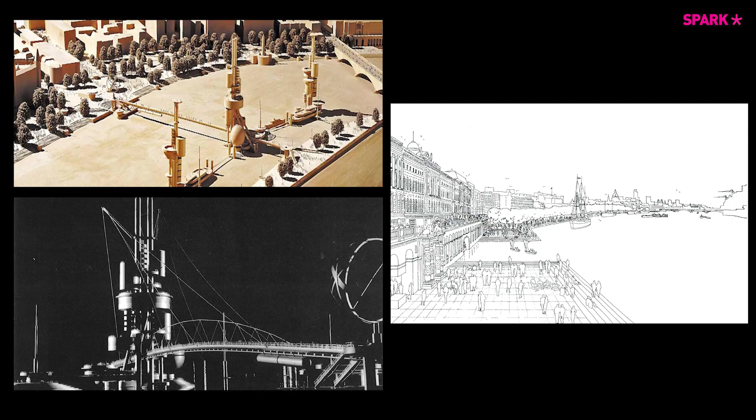There are a couple of projects I did before I started my own practice that meant an awful lot to me, and I'll tell you why. When I graduated in 1984, I was incredibly lucky enough to work for Richard Rogers and Partners, as it then was, on a number of projects, but this perhaps was the most interesting for me, and I'll tell you a little bit why.

When I was in school, finished at the RCA, and I'm sure Mike will attest to this, there were sort of 2 camps of thought that were prevalent at that time. One was postmodernism, and the other one was British high-tech architecture. But a lot of people say you couldn't call high-tech a style.

But I was enamored with British high-tech because I loved its legibility. I loved the component nature of it. And I always liked to draw nuts and bolts and staircases. So, as I said, I was very lucky to be offered a job at Richard Rogers and fell into it.

But to my shock, I ended up working on this project that was produced by Norman Rosenthal at the Royal Academy under the banner of Rogers, Foster and Stirling. So funnily enough, I sat in a taxi with Norman, Richard and Mr. Big Jim himself, which was 7th heaven as an architect.

But I suppose what was surprising about that project was my understanding, or getting to know, that Richard was really interested in urbanism. It wasn't just about high-tech nuts and bolts. This was a bit of a surprise to me, and maybe I was a little bit stupid when I was studying, that I didn't understand the greater philosophy of architecture and the importance of the thinking behind how architecture can contribute to cities.

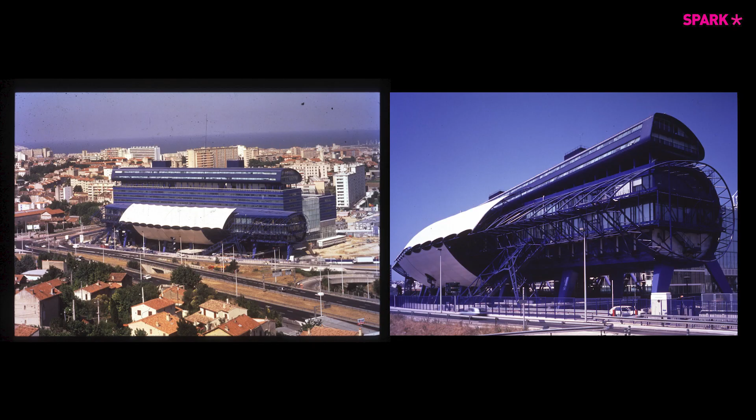When I left Rogers, I went to work with two guys who'd worked for Rogers, then quite quickly I went to work for Will Alsop on this project, Le Grand Bleu. I was project architect for the four-year generation from its design implementation through to construction. At that time it was the last of François Mitterrand's Grand Projets, and one of the largest projects being built in Europe, or anywhere—nearly 150,000 square meters.

I thought I'm never going to work on a project of this scale again. It's testament to Will's ability that he was able to understand a project of that scale and piece it together in a mechanically interesting way. It was an extraordinary learning curve for me, and what stayed with me is learning to deal with that scale of project—in Europe it might have been large at the time, but in Asia, where I work now, it's an average size project.

The third project, in my hometown of Cardiff, was part of a series of quangos set up by Mr. Heseltine and Margaret Thatcher. They did a lot of damage, particularly to the Welsh coalfields, shutting them all down, but they did set up these extraordinary businesses in the UK—in Cardiff, Manchester, Liverpool, Glasgow, and the Royal Docks in London—quangos set up to regenerate disused parts of cities.

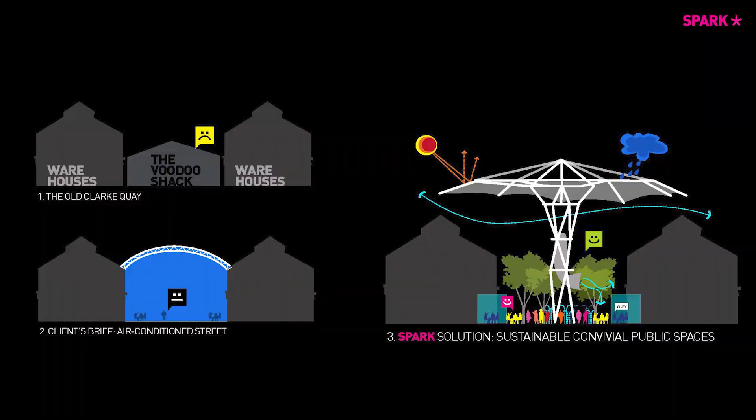Our client, CapitaLand, bought it and asked us to look at regenerating it. They had a previous scheme from the late 1980s that had failed very badly. After our intervention, it regularly gets 12 million visitors a year, an extraordinary achievement—it's basically a nighttime district. We put umbrellas over the roofs, with the client saying we should air condition it, since everything in Southeast Asia is air conditioned to get rid of the humidity, but we persuaded the client to naturally ventilate it instead.

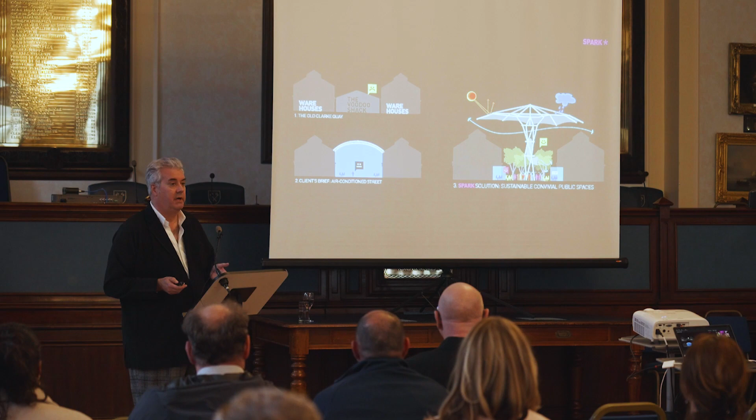Sustainability wasn't really a talking point in Asia at that time. But again, we managed to convince them to cover the streets, naturally ventilate them, and blow a sort of riverine-like breeze through the streets that gives you physiological cooling. So the temperature in the streets is reduced by about 4 degrees. It doesn't sound like a lot, but it makes them very comfortable.

No, 5 degrees, I lie. So it's very successful, and lots of tourists go there, and it became part of the brand identity of the city for a long time.

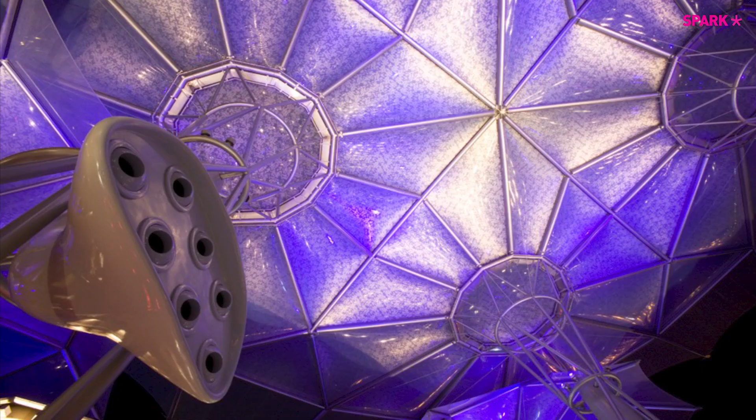And it was the first project in Southeast Asia to use ETFE foil as well. After this, the Beijing Olympic swimming pool used foil, but this was the first time. And there was a lot of process of getting agrément certificates, etc., to make it work.

So architecture, even though it looks a little bit alien to the city, can be great for place and conviviality, I think. And as I said, it became used in advertising on airlines and in the city about a great place for people to be, a great tourism destination.

It's rather ironic that when we were starting the project, the Urban Redevelopment Authority in Singapore, which is a bit stuffy, I have to say, was very opposed to this project. And they said, Stephen, if you go up on top of the hill in Singapore and look down, you'll be able to see this and it'll look awful. So you dutifully go to the top of the hill, and can't see it at all.

So they were opposed to it, and it was only our client having quite a lot of financial muscle, saying to the planning authority, if you don't allow us to do this, the whole place is going to be disused and negative, a lot of negative energy until somebody does something about it. So they gave in, we built this, and then ironically, they're sort of using it in advertising when it's all done. So, nice story.

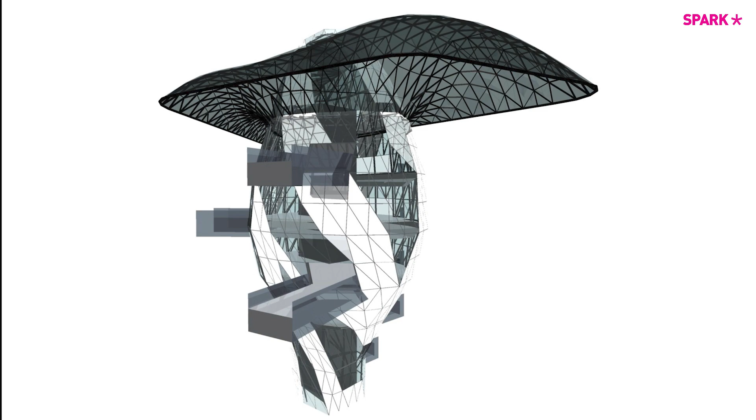So this is a section through the project, quite dense, on quite a tight urban site. But it had some very special components. This is called the Crystal Lotus that sits at the heart of the building. And it's there because the plan is quite deep, perhaps too deep for a typical retail shopping mall. So we decided to break the space and put this sort of glass plug in the center that's got specialty shops inside it and vertical accommodation.

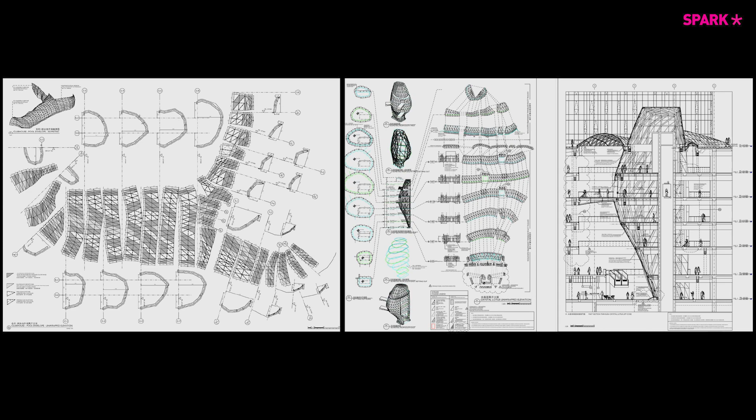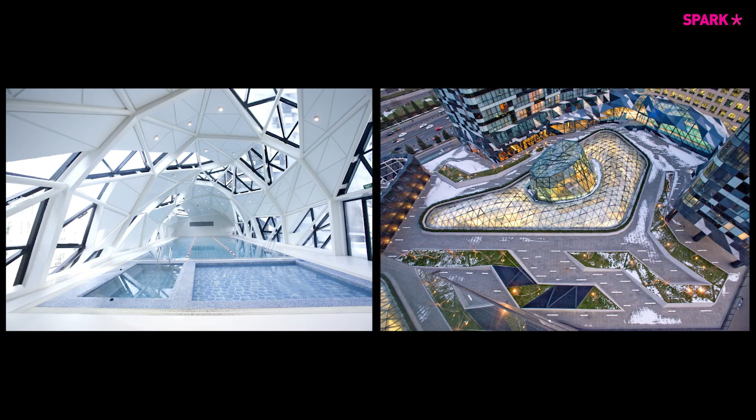And of course, it's quite early on in China. It's nearly 18 years ago now. So we produced, using sophisticated software, a lot of flattened out drawings of this and the roof structure, etc. But when it was built in a very sort of agricultural manner by the contractor, they didn't understand these drawings. They're using pieces of string to set out quite a dynamic roofing structure, which, to the horror of our engineers, Arup, said wouldn't work, and the roof was going to collapse, but it hasn't collapsed yet.

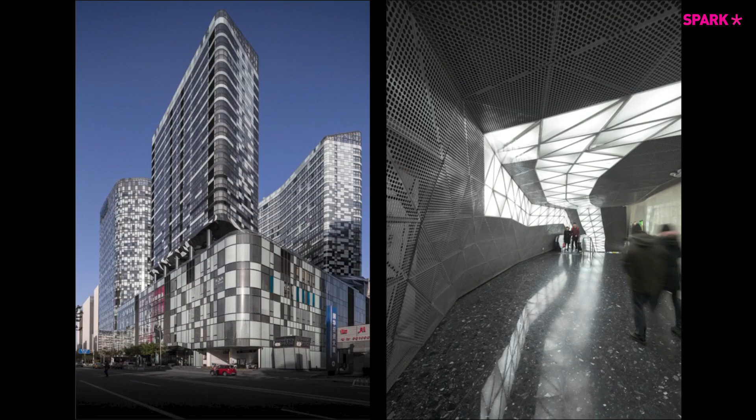So that's the swimming pool and the roof over the atrium space. It uses this tessellated geometry, which predates the current mathematical findings on roof structures. It's a leitmotif that runs through the whole building, this triangulated surface.

And it's got a metro station below it as well, which connects to the metro and to the section of the building. Here you can see people occupying the spaces outside at night time - a very nice picture of urbanity in Beijing.

I also worked on this project that started while Will was still alive, and carried on after he'd moved away from his original company. This is called the Shanghai International Cruise Terminal, and again it sits in a very important part of the city. The old Bund of Shanghai is here, and the old buildings from the 1920s and 30s are here.

Mayor Han, who was the mayor of Shanghai at the time, wanted, as in a lot of European cities, to extend the public pathway all the way along the Bund, across Suzhou Creek, and out towards the river. So a big garden allowing people to access the riverfront, which had predominantly been private domain of docklands, came to the fore.

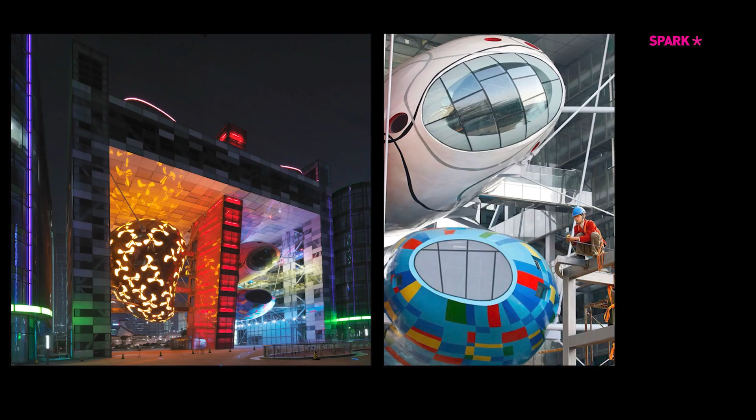But at the center there's this quite exuberant space that's an archway. It's an arch because we couldn't take any vertical load down at that point, as there's a tunnel under the river. So these quite interesting objects were initially designed to be cafes and restaurants, and are now being leased by Ferrari to sell branded goods.

Here you can see a chap finishing off the cladding. It's quite dynamic and theatrical at night time, and is the gateway from Daming Road in the north to this new embankment garden in the south. So it is a gateway to the river.

The next are two projects we've done for the same developer in Malaysia. This one is on the island of Penang, one of the old states of Malaysia. It's two residential towers that are the tallest twin towers in Penang. The one at the back is a residence, and this is a hotel tower.

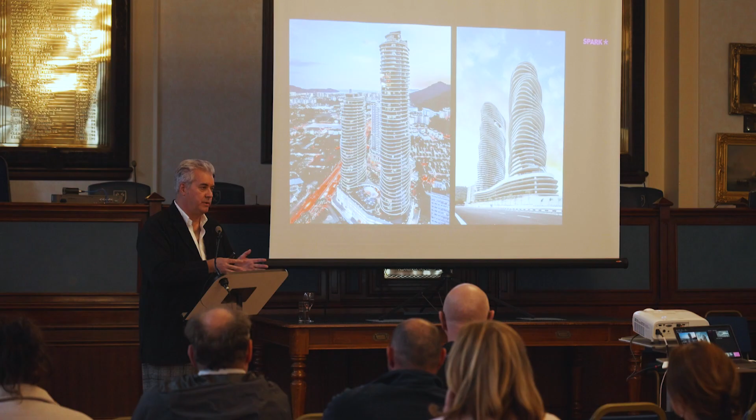It looks very complicated geometrically, but it's actually quite simplistic - the apartments and the cores go right the way through as a vertical cantilevered core. Then the slabs of the apartments are twisted slightly, rotating around the building, giving it this very curvaceous geometry.

Then at the mid-level of the apartment tower there are two pods: one is a jacuzzi pod, so you can have a jacuzzi looking out over the straits, and this is a clubhouse, which also gives fantastic views over the straits. Residents can hire these for events, just the same way as this room is being hired for this evening - you get wonderful views.

And then the top of the podium, the top of the car parking deck, is turned into a gymnasium and swimming pool, for aqua aerobics for the residents and for the hotel.

For the same developer, we recently finished this project in Kuala Lumpur, in the Mont Kiara district, which is predominantly a residential district right at the heart of Kuala Lumpur. We didn't start this project - there was another architect involved who designed a quite boring series of three towers, which the client didn't like at all. They said, well, can you do something interesting with it?

So we came up with this series of fins based on his thumbprint, which he quite liked the idea of. So that's what we did - we clad the towers with his thumbprint.

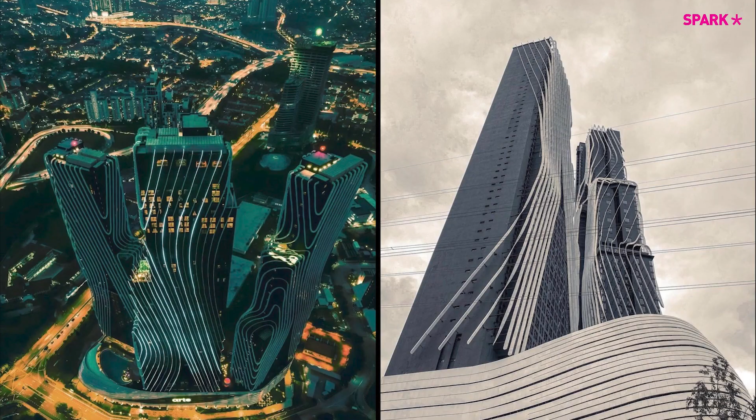So they become quite iconic - I hate that word actually, iconic, I don't, let's try and stop using it - so they become interesting on the skyline of Kuala Lumpur.

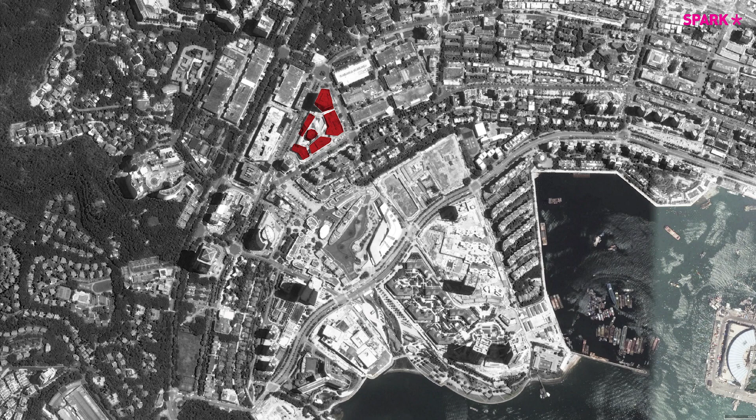So our project, and the reason I'm showing it to you, you can see the figure ground plan here. It's quite permeable, deliberately so, to engage with the streets around it, so people can move through it. It becomes like a city living room. You can see the diagrams - it's got a bus station and a metro station that sit to one side and below the building. The permeability of the plan is important to bring people into this new courtyard, the living room of the building.

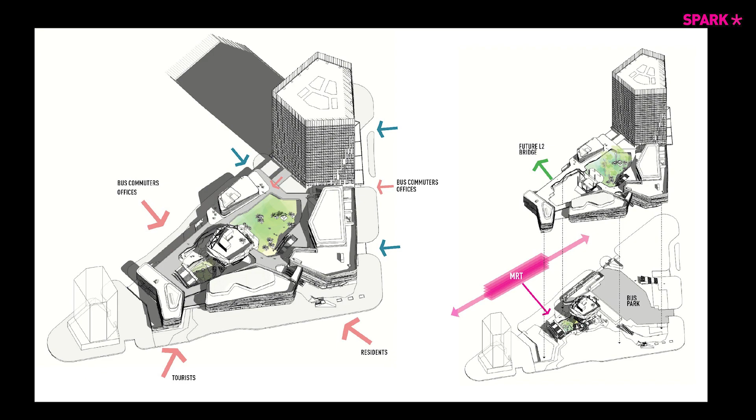So there you can see the diagram that proves that. At the center there's a lantern-type building that hovers over the courtyard space. This is the connection down to the metro and the basement shopping areas, and the terraces around it. It's basically an open-air shopping mall, and there aren't a lot of these in Southeast Asia because of climate control. But it's a much more sustainable way of developing the shopping center typology, especially where the climate isn't too bad. It's quite temperate in Shenzhen, not really humid like Singapore, and relatively warm, so it's perfectly appropriate for natural ventilation and providing this sort of space.

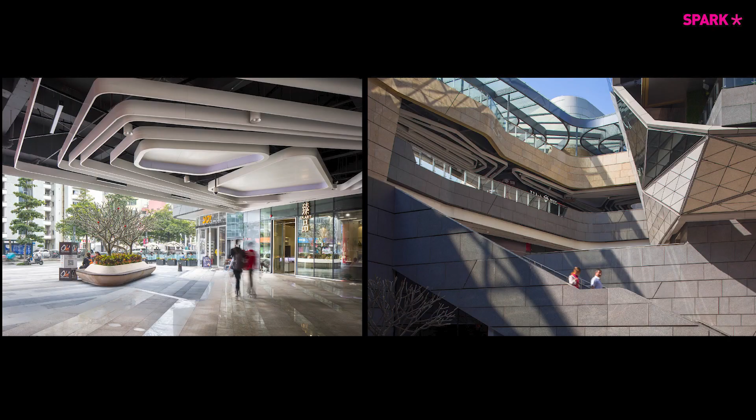So here you can see one of the openings to the street that bring people into that courtyard. It's been very successful, fortunately.

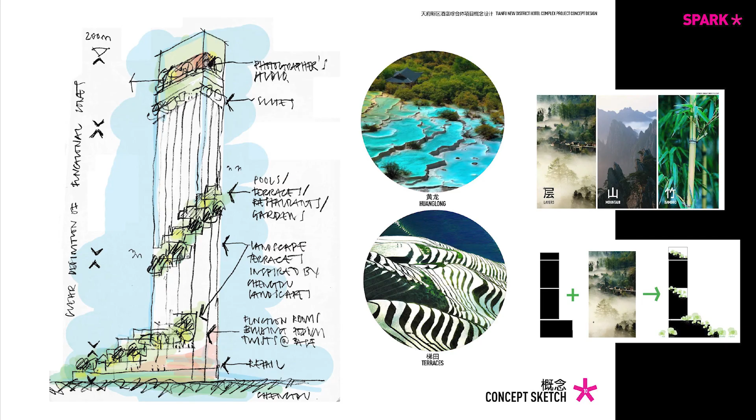And one we're working on at the moment that's under construction, again very commercial in its disposition, is a hotel tower in Chengdu - one of the most beautiful cities in China. They have a very different culture and characteristic there; it's much more slow-paced, a much more green environment. If you're ever going to China, make sure you visit Chengdu. They've got a great affinity with tea, so there's a lot of tea drinking that goes on there.

But they've also got these extraordinary pools outside the city called Huanglong, these mineral pools that are very beautiful. So we liked the idea of those pools and the terraces you find. We're trying to bring terracing into the architecture so we can green it in the future.

So this is one of our images of the project. You can see it's terraced at the base too. It's about giving quite tall buildings - this is 150 meters, I think - some sort of scale that's a little bit more human. If you go to Shanghai or Beijing you see all these tall towers, but the street level is pretty awful because they don't care how the buildings relate to the urban plane. So this is about trying to give some measurement of scale and breaking down the architecture, so it has a better scale and is a nicer place for people at a lower level.

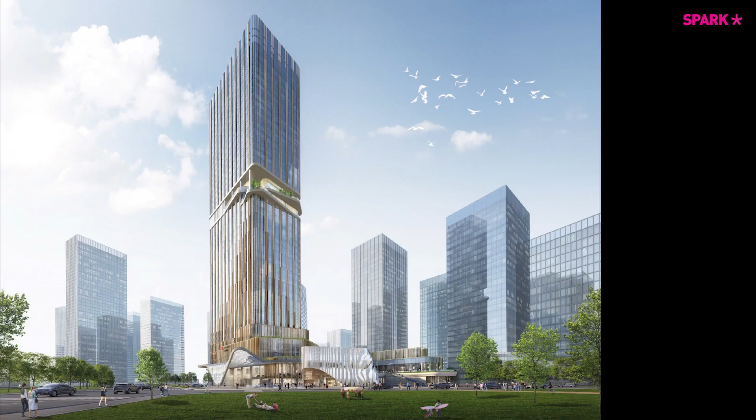So we spent a lot of time developing the buildings around the base. This is a new art center we're designing for the client - not Marriott, but the owner of the building, who is a very famous photographer in China. So this is where he's going to show his work.

This building is clad with aluminium foam, which is quite an interesting material if you don't know it - it's aluminium under pressure with gas that creates this extraordinary natural honeycomb type structure. So the gallery we're designing is going to be clad with aluminium foam.

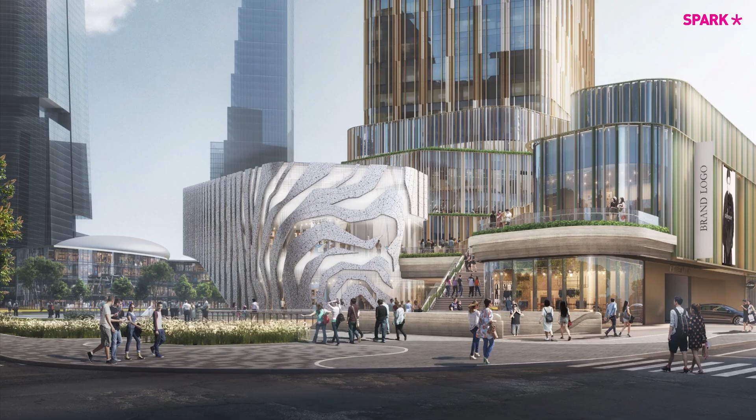Very messy sites in China, unfortunately, quite hazardous. So a different type of retail project. I suppose it falls in the canon of what can you do with buildings if you don't knock them down. There is a prevalence in Asia to demolish things, particularly in places like Hong Kong where land values are so high—get rid of it, start again, increase the height, increase the density. So you face that quite a lot.

But one of your other C's is about conservation, trying to look at what you can do with buildings that perhaps are not so old. This is a project we've done in the heart of Singapore, in the arts district called Selegie.

When I was working with Will, we did the competition for Bankside, which was eventually won by Herzog & de Meuron. Nick dutifully came round to all the architects and sat down and talked to us about his ambition. He said, we don't want to convert Bankside, we want to transform it.

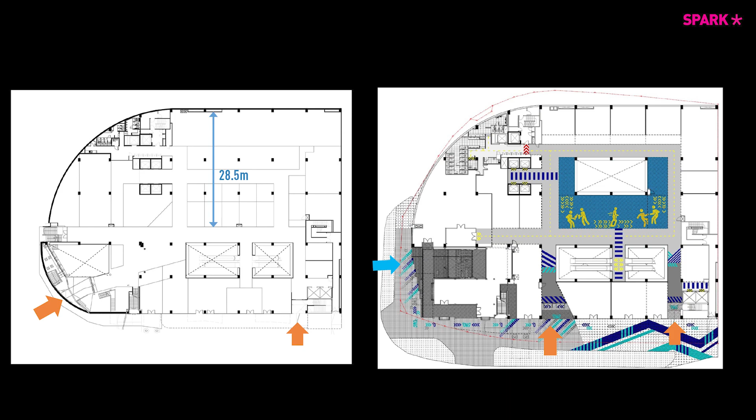So that's the before and that's the after. But there is some sort of sense to what we're doing—it's not just fun, not just about creating willful pieces of architecture. It's taking space that was dead inside, because again, like Raffles City Beijing, it's a very deep plan, not earning the client any money. You walk in, you can't see the shops at the back, so nobody really wanted to rent them. So we took them out.

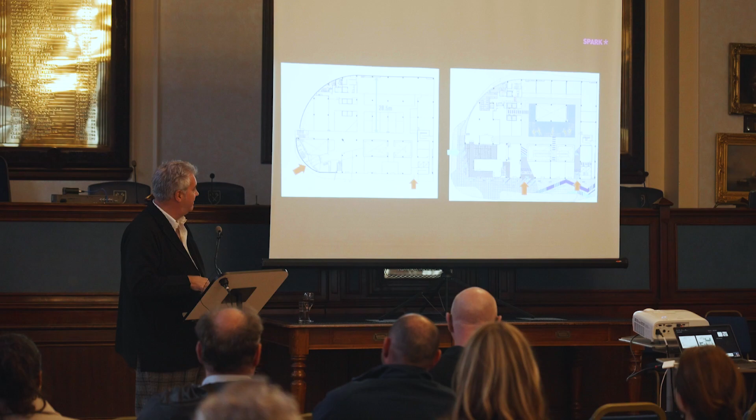We took the GFA out, the gross floor area, out of those places, cut a hole in the slab which connects the ground floor to the basement, so you get daylight into the basement and can see the activities there. But importantly, it helps us move that floor area that was in the center of the building to the corner.

This is the high traffic area—this is where the most value for the building is created. So we took precious area from the center and put it outside, where it's earning four times as much money.

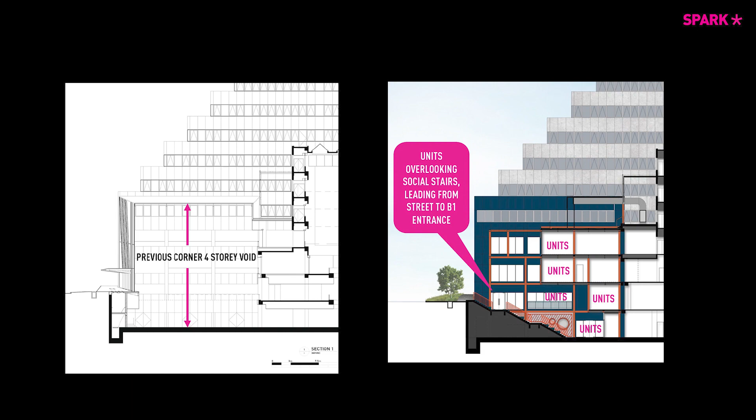So we also added a staircase, which is like a sort of urban connection—again going back to that word, connectivity. It's about trying to drive footfall from the neighborhood and adjacent buildings into our building and then down into the basement. It's a sort of social staircase, a place for younger people to be.

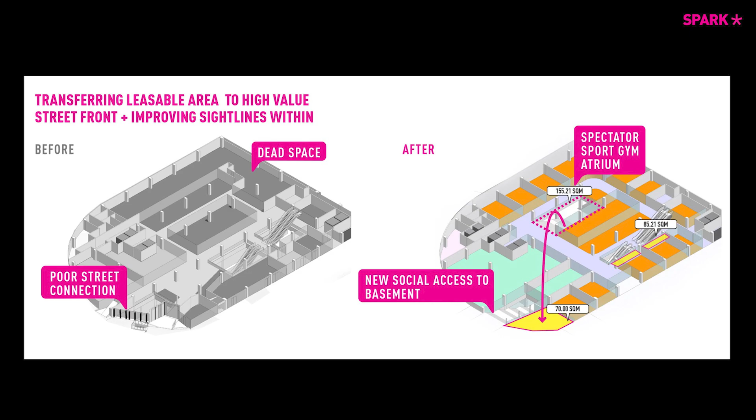So some plans, that's the social staircase. The corner is a delight for bloggers and social media, capturing the sort of energy of the space.

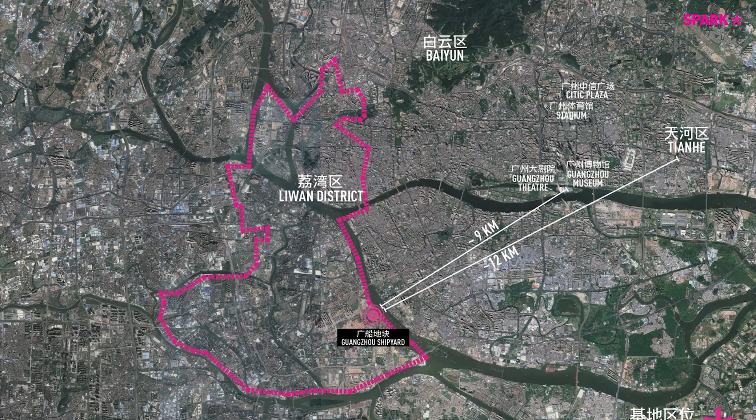So I want to talk a little bit about the master plan work that we do. Loosely titled Reflective Nostalgia, which you'll understand why. The first project is the Guangzhou shipyard, which sits here—it's the old international shipyard, one of the most important shipyards in China, started in 1910. This is the Pearl River, a very important river in China, passing the site here.

When you first go there, it's like Cardiff Bay all over again. It's the lifeblood that was the city, which has gone elsewhere because it's very expensive to manufacture ships here—now it's all in Taiwan or somewhere else. The economic roller coaster has moved on, left Guangzhou, and disappeared. So what on earth do you do with these big sites?

You need somebody like Michael Heseltine behind it to say, well, we're setting up a Quango here, this is what you do. But of course in China it's a combination of government and private enterprise that does it—perhaps similar to the times of Margaret Thatcher and Heseltine.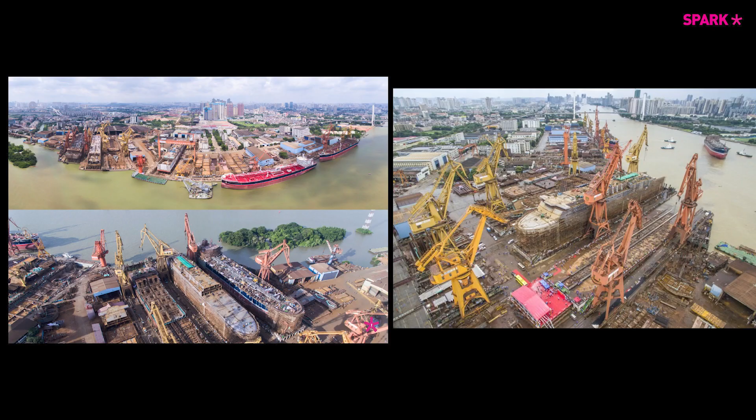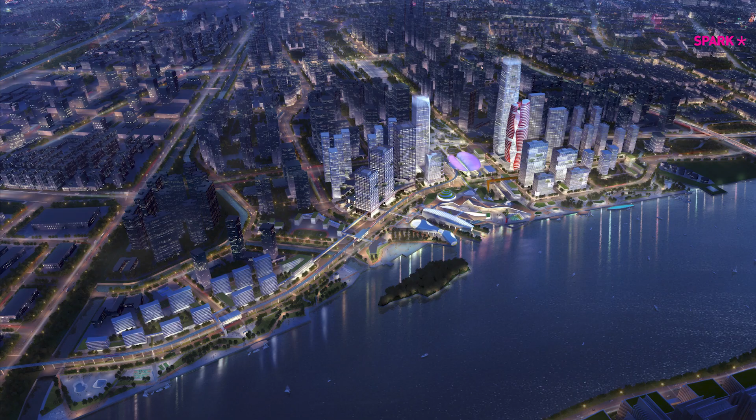But you become enamored with photographs like this, because as architects and designers you're interested in the way things are put together. So the nature of shipbuilding really informed a lot of the things I was thinking about, not just for the master plan, but the buildings that sat on it as well.

So this is the master plan—it's about the size of Canary Wharf, if you know Canary Wharf. It's about 1.6 million square meters of real estate development, to be built over the next 10 years. Although we've done the master plan, we won't do all the architecture, just focus on certain parts—this is our area here, the central courtyard, maybe this tower, and the riverfront here. So these are the pieces we're concentrating on.

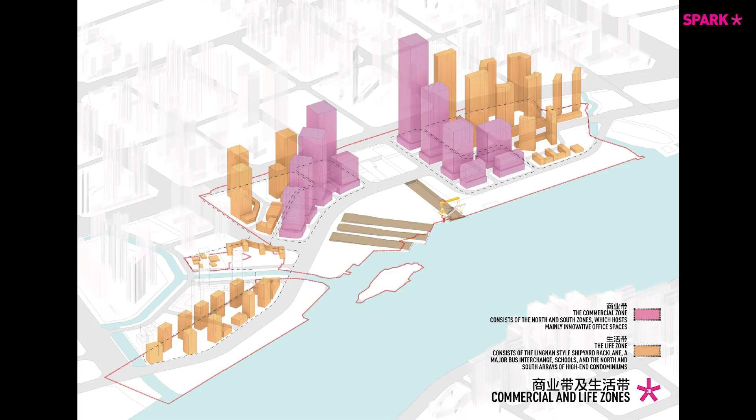It's a government developer with a private developer called CITIC, who are also partly government-based. The master plan has a number of zones, of course, because it's so large—there's a commercial zone that wraps around the central courtyard and the waterfront, and then residential and lifestyle zones that move out east and west.

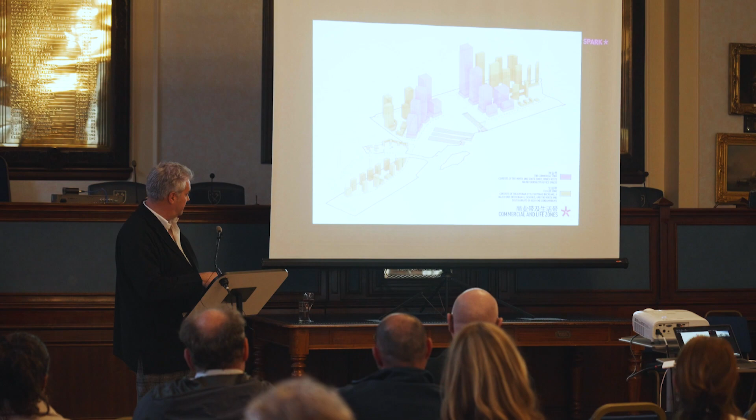Unlike Canary Wharf, built by the Reichmann brothers in the 80s and early 90s, which was monocultural—all office space—I suppose people have learned the lessons that it's impossible to make a project like that work, because it's got very much an 8:30 to 5:30 lifespan, and at weekends it was dire going to Canary Wharf because there was nobody there. The retail centre didn't work. So this has got everything—schools, a hospital, a lot of office space, but all the other facilities too. So it's not 9 to 5, it's 24 hours a day, 7 days a week.

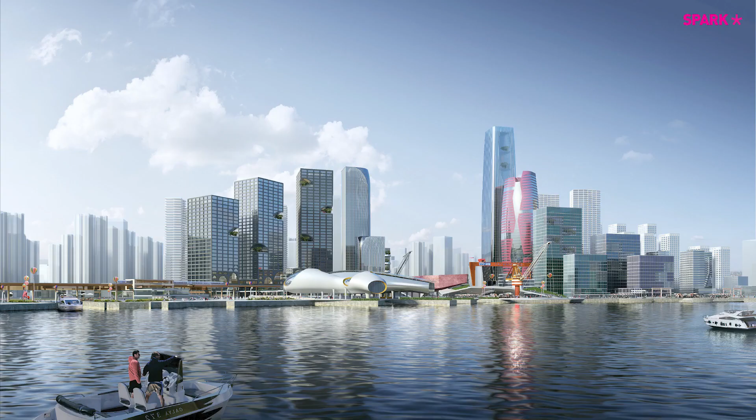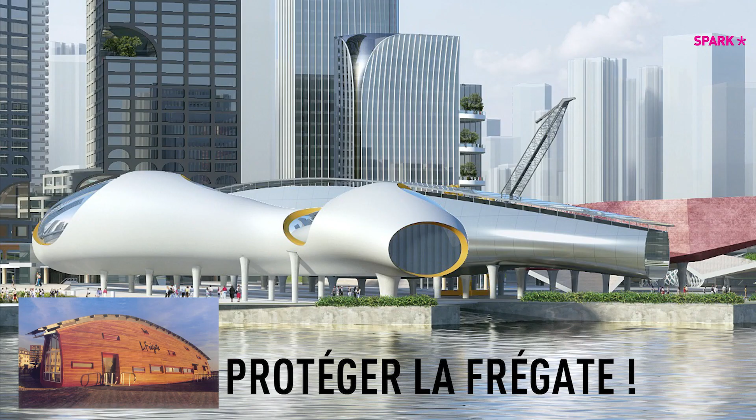So it's an image that was approved by the government. It's the master plan. And you can see the sort of language of the architecture that's come on from Cardiff Bay and the Cardiff Bay Visitor Centre, and the sort of nature of the shipbuilding type geometries that we use for the building.

Mr. Mason reminded me a little bit earlier on, Derek to his friends, put in a plug for La Frégate. Well, this is my plug for it. I did work on the building with Derek a long time ago, which was a very enjoyable process, actually.

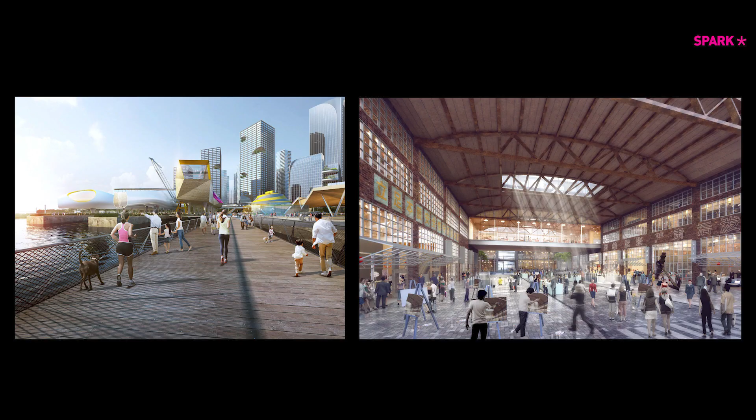So that, again, to me, understanding the way buildings are put together, the sort of shipbuilding technology, has informed a lot of the thinking in my career, and this is an opportunity to design buildings that are not cafes, but cultural buildings that sit facing the river, almost putting their toes in the water, cantilevering over the edge of the old docks and the slipways.

Some other images of the project: the retention of some of the big old warehouses and the new boardwalks across the buildings, and trying to make places that have a nice scale for people when the buildings are relatively tall. Even the shorter buildings are over 120 meters tall.

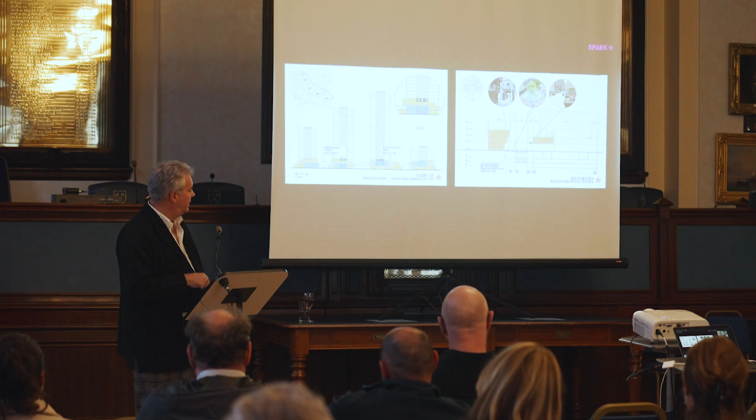So again, this is about moderating the scale of the enclosures and the F&B streets, and curating the ground plane and curating the first and second levels of all the office towers to create a high line type effect.

And learning from streets around the world that I like very much, like this Marunouchi Nakadori in Tokyo, which during the week is a sort of business street, but then it's closed for the weekends and it takes over, becomes very different in the social demographic that it attracts.

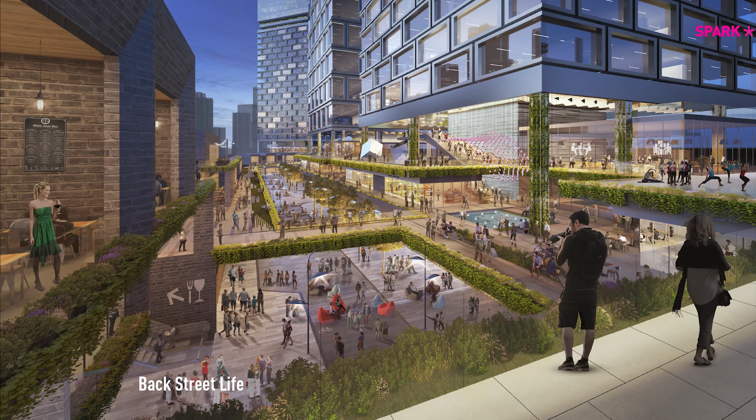So we're trying to bring that aesthetic into what we're doing for the back lane of this project, which is very much about lifestyle, eating and drinking and having a good time.

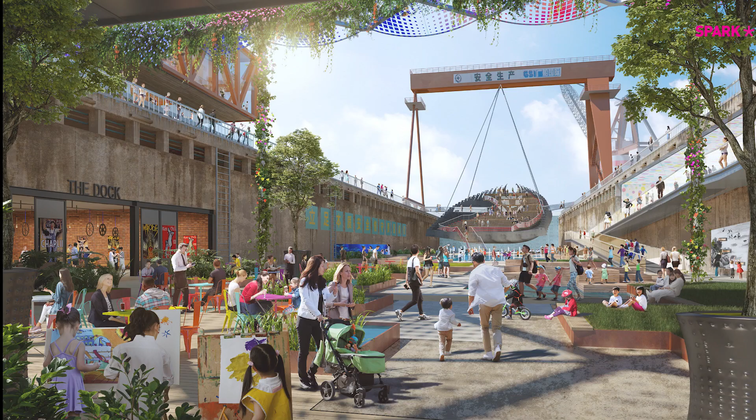And then the old docks, what do you do with the old docks? Well, one's turned into cinema spaces and again, more F&B spaces.

And then this is the heart of the project. This is where the infrastructure comes up. This is where the metro line engages with the wider master plan. So the metro is behind us, basically where I'm standing here. So when you arrive at the lower level here or at the upper level, you have this enormous canopy and an exhibition building at its heart.

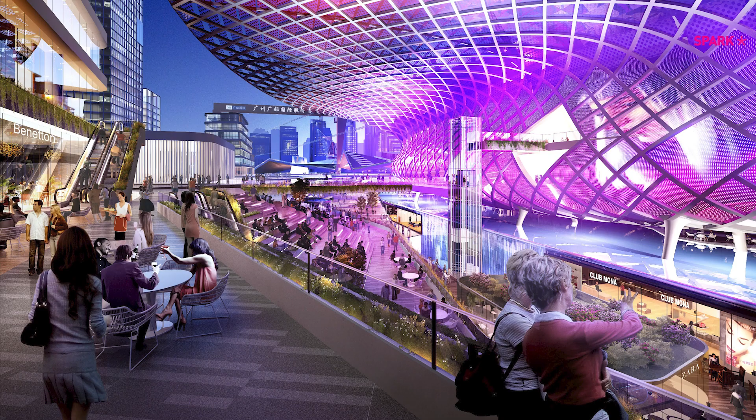So it's not a spectacular—or it will be a spectacular gateway between the arrival threshold and the river space as well.

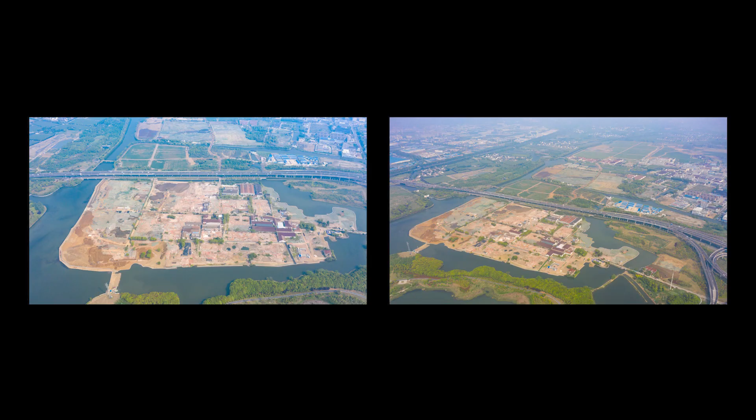So another master plan project, but loosely titled Social Picturesque, which I'll explain to you as we go along. This is one that's current and on the drawing boards at the moment. We won a competition last year to master plan this island in Suzhou, and if you know anything about Suzhou, you'll know that it's a very famous water city in China, not that far from Shanghai, actually.

It's got very beautiful traditional Chinese gardens that have an interesting layering of the spaces involved in the threshold and the way you move, and the perspective changes as you go through. So it's very well controlled, but you always see something in the distance that carries you through. We're trying to use those ideas in the way that we master planned the space.

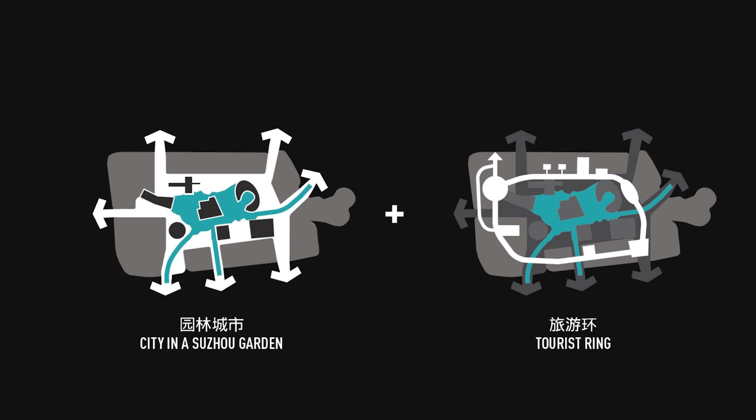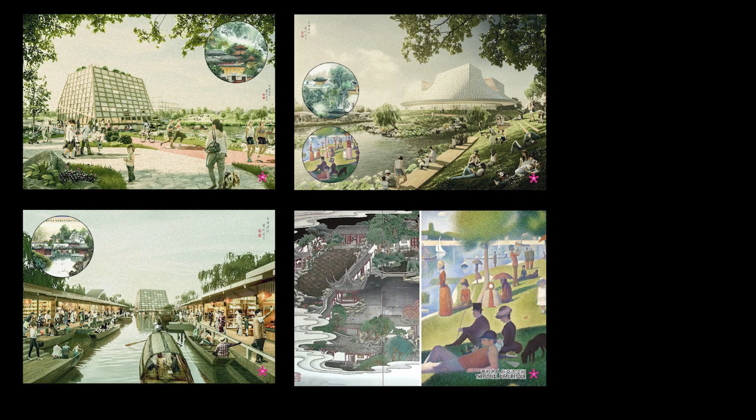And it has at the center this sort of Chinese type garden, and then a ring around the outside that connects all the new buildings that will happen here in the future. So this was part of our competition entry point.

So here you can see the sort of traditional Suzhou Chinese gardens, and then inspired by paintings like La Grande Jatte by Seurat, which is about perambulation, really. It's about standing and picnicking and looking at the river and looking at what's in the distance. So for me, that's very much the idea of social picturesque, that you're providing places of rest, points of interest for people, where they can see the next destination.

So it's about curating that experience and creating a route for these people to take that's also quite interesting before they get there. So some of the master plan diagrams show you have this sort of ring of interesting projects that sit around it, and then views from those buildings through the lake that connects them all together.

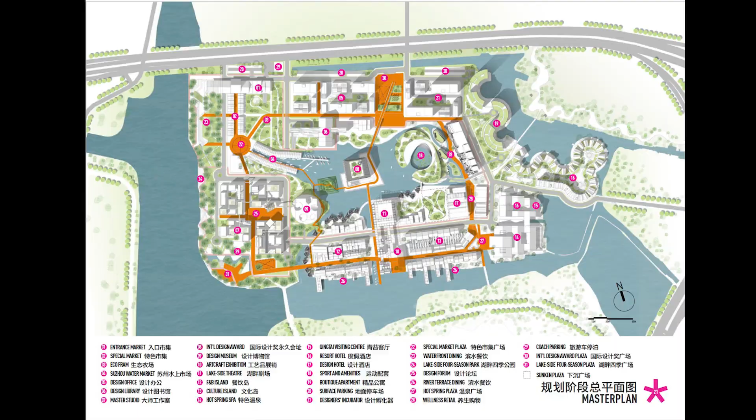So having done the master plan, which I finished last year, we're now designing the first phase of the project, which is a market area, a water street, and some studio spaces that will be leased to designers. So this has started construction.

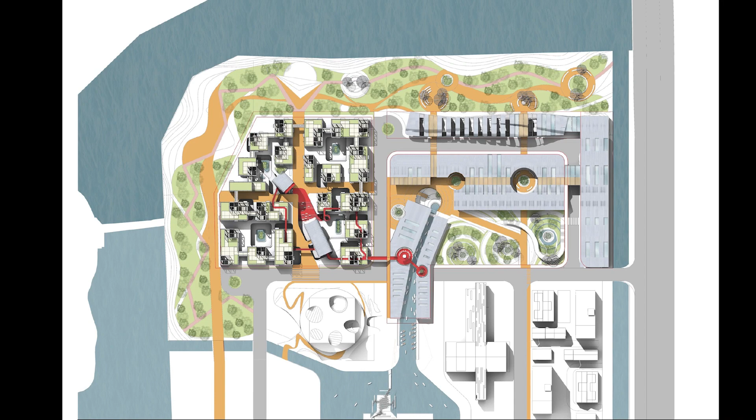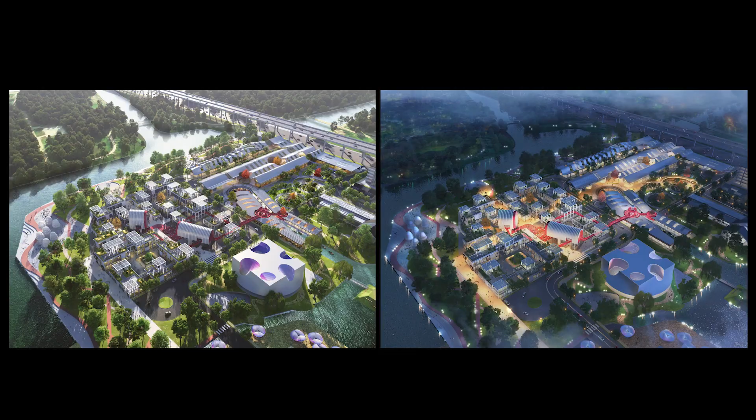The site images you saw at the beginning show the site cleared of all the old industrial buildings that were there. So that's the plan of phase one and some images of it. There's a gallery building here, there's a site for the studios that will be rented out with another gallery here, and then the market and market streets here.

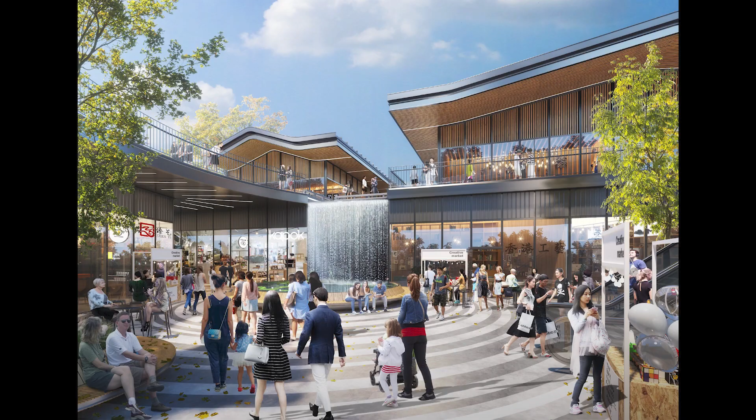So it's about just over 80,000 square meters of real estate. This is the entrance to the market area, the B1 area and the car park either side, and the arrival sequence, and then the water street.

So let me go back one. You see what I mean about that sort of picturesque idea. You're standing on the threshold of the street, and in the distance you see one of the future buildings here. So I suppose it's curating the journey for people.

Minhang in China, which is a district of Shanghai. Again, we won a master plan competition to look at the center of Minhang district, which, like a lot of the outer lying districts of Shanghai, is trying to improve itself quite a lot, basically to earn more revenue and to attract new businesses and increase the population. So central government in Shanghai has commissioned a lot of these outer districts to really revamp themselves.

So Minhang has this very important river. You wouldn't think it's terribly important to look at it, because like the River Thames, as Mike said to me yesterday, it's really forgotten about. London, to a certain extent, has turned its back on the river, unlike places like Paris. And this is very much the case in Minhang, where as the city has expanded, there's been a lot of urbanism and redevelopment, and that redevelopment has really turned its back to the river. There are a lot of degraded warehouses, you can't really get to the river, and it just became a dumping ground. So it's like a found space, almost.

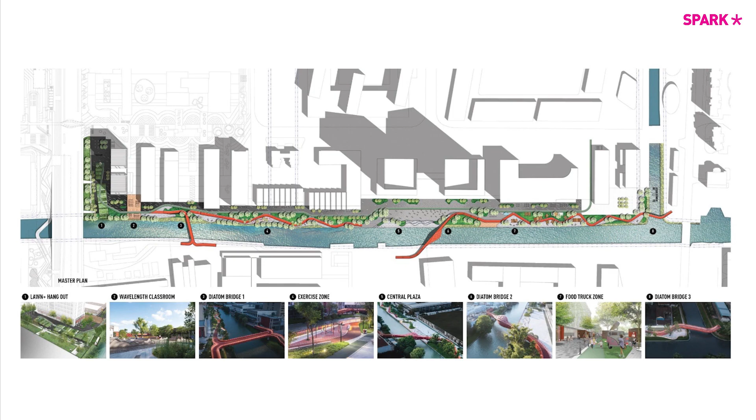So it's about, again, connectivity. It's about increasing the land value. But it's also about making a wonderful place for residents to increase the amount of conviviality, which sounds a little bit ironic when Shanghai is in lockdown and nobody's allowed to go out. But in the future there will be lots more people here.

So the idea I had was about this social wavelength of communication, and then diatoms — if you know what diatoms are, they're sort of algae that clean water. So it's not just about increasing communication between spaces and people, but it's about regeneration of the water, the infrastructure that supplies this space with its extraordinary quality.

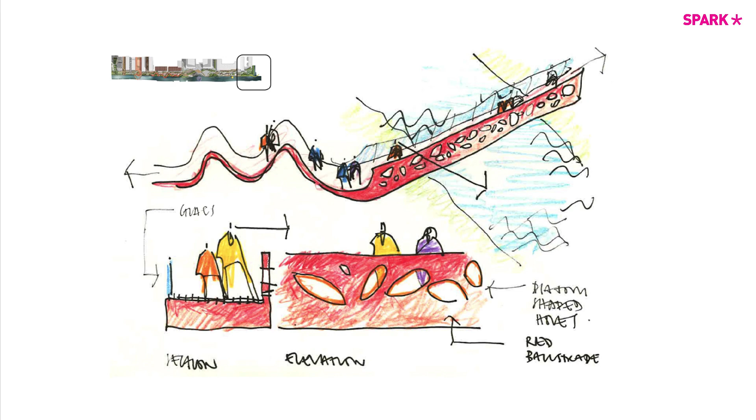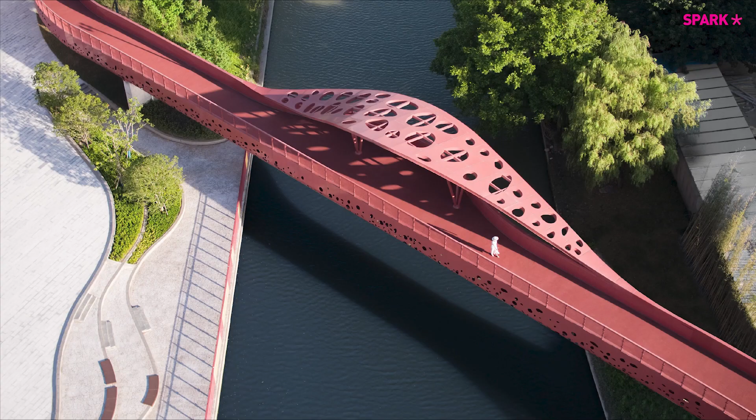And some sketches of the bridges I did at the start of the project. So that's one of the main bridges that crosses the river. Nobody had this experience previously — you're confined to spaces that were maybe 40 meters away from the river, so you never really perceived it. So now people can actually walk across it and see the river in a whole new light.

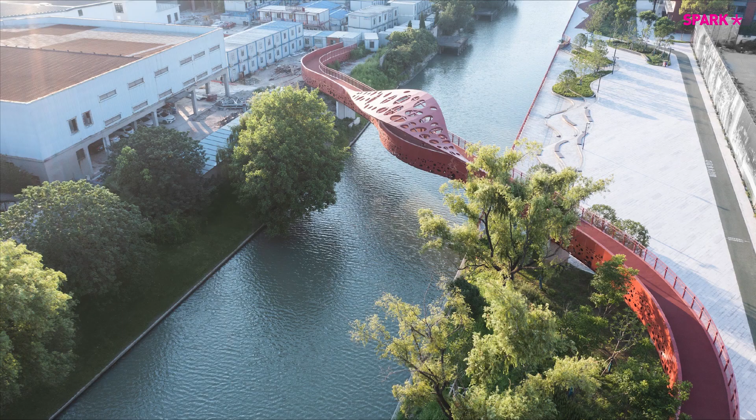And we've done lots of measures about cleaning it up, so it's quite clean now. The landscaping we designed has this riparian language as well, flowing like the river and creating different zones for different activity, like cycling and performance. But you can see the area that's had nothing done to it, which is pretty grim compared to the first side that we've tackled.

So it's a great place for people. And then you can see in this extraordinary photograph, there's a bridge here and the two bridges here. So this is phase 1, and phase 2 will be along here.

So this is all government-led work, and quite a progressive government actually, because they want to increase, as I said before, all the land values here, get rid of these low common denominator warehousing functions, and replace it with high-tech industry, which is a burgeoning economy in Shanghai at the moment.

So the last part of this talk I've called Future Perfect, because when we have time and we're not working on projects like that, we do our own think pieces or thought pieces that we loosely call research projects. This is quite an old one. I suppose the debate about waste plastics and ocean pollution through plastics wasn't such a prevalent topic as it is currently. I'm not saying I invented the idea, but it was a long time before David Attenborough picked up on it.

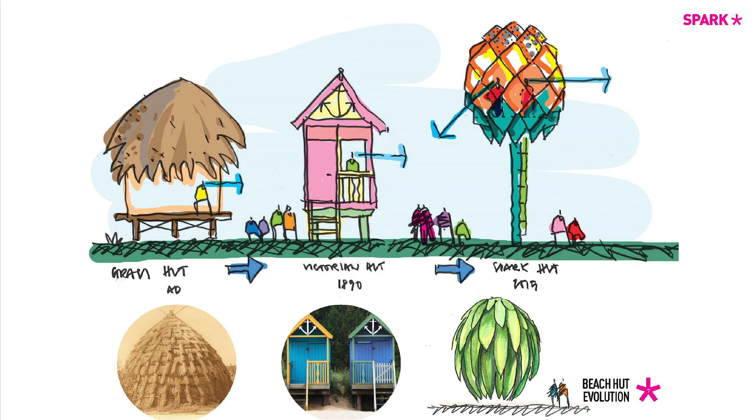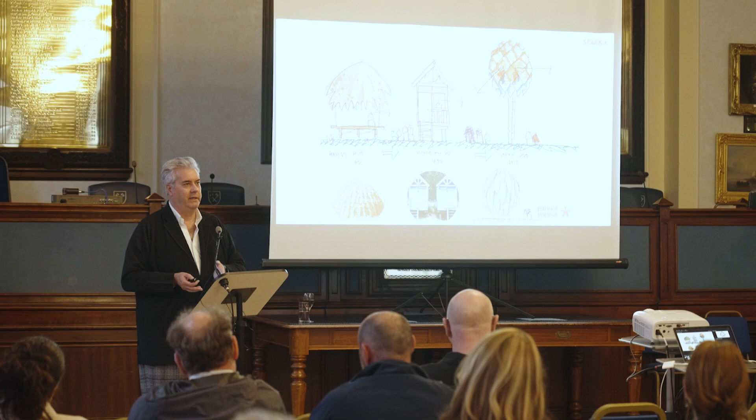So I'm thinking about the evolution of beach huts. In Singapore, a lot of young people live with their parents up to the age of about 30 before they get married. Then they go camping on the beach so they can be with their girlfriends or whatever and have sex on the weekends, not to upset their parents. So the beaches in Singapore are full of tents on the weekend. I was quite intrigued by this idea.

So there's this idea of where did the beach hut start and where could it go to. There's an evolution from the grass hut to the sort of Victorian beach huts that you find on the north coast of Norfolk and elsewhere in Britain.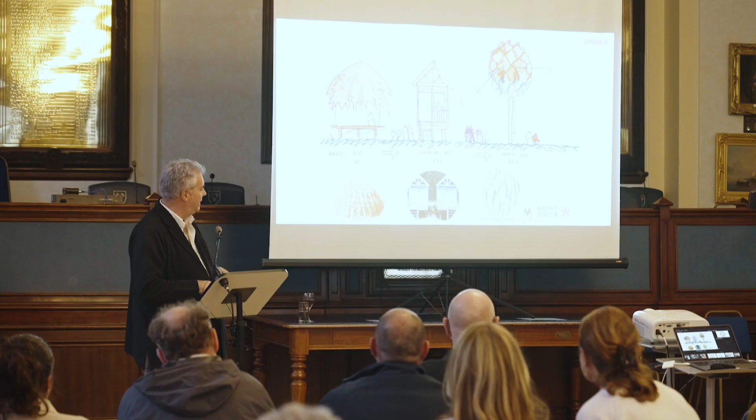And then my idea of the Casuarina C-type beach hut made out of recycled HDPE2, which is predominantly the plastics you find in containers, drinking bottles, detergent bottles. It's also the plastic my daughter used for these little things called Hama beads, and she used to spend hours making these little things.

Hama beads are quite interesting because you set them together on a frame—I'm sure you've all done it at one point in your life—and then you put a grease-proof sheet of paper over the top, get an iron out, and fuse them all together with a little bit of heat.

So HDPE2 is very malleable as a plastic and can easily be recycled, as these tests prove. You get these wonderful concoctions of plastic. These are our tests of plastics in the office.

And then these are the beach huts. So we've taken the HDPE2, and they basically form large-scale shingles that are attached to a frame. Then the tops of the shingles are coated with thin film PV, so they generate some power. There's a fan inside, so they're quite sustainable.

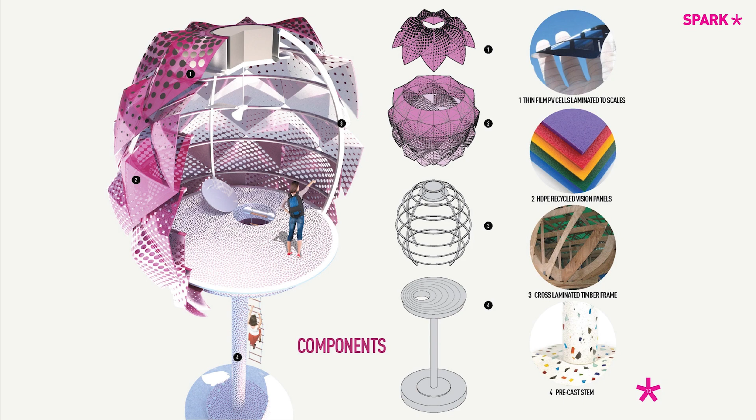So that's the way the structure goes together. You have a cross-laminated timber frame on a recycled concrete structure that's micro-piled into the beach, and then the shingles clad the buildings. Quite a simple idea.

And it gives you phenomenal views over the beach. Engaging to look at, and when they light up at night, they're quite picturesque in a way. So we've been trying to sell this idea to the Singapore Tourism Board, who like the idea very much, but of course they want somebody else to pay for it. So we're open to offers.

This was inspired by the first Jony Ive iMac, where they had all the iMacs in a series, so you can get these in all sorts of colours. It's just about sorting out the plastics and reproducing them.

Another research project I did, which is a little bit more serious than the beach hut, looks at the condition of aged living in Asia. Singapore, like Japan, has got the worst balance of young people to old people, where nappies for old people are outselling nappies for babies, which was such a horrible thought.

Let's move on from that quickly.

So yes, Asia is a very aging society. And in Singapore as well, because of rapid urbanization from the late 60s and 70s, all the farmland that used to be there, from post-imperialism and the early days of the Malaysian Federation, it's all gone. It's like concrete with a few pockets of very beautiful gardens. But ostensibly, there's no farming. Everything is imported.

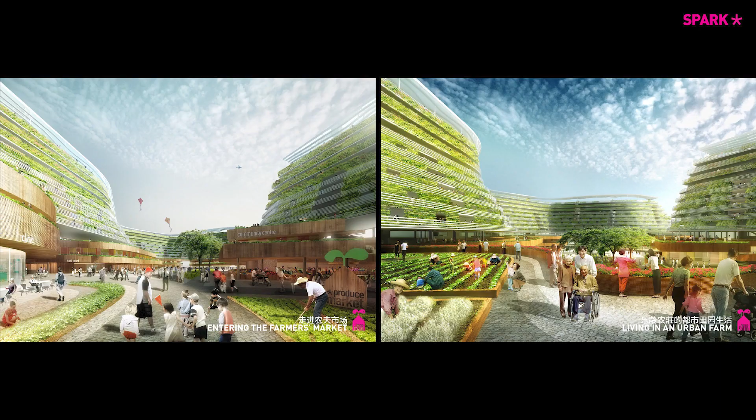The interstices of this place are like a big open courtyard, again engaged with the streets around it. The apartments sit behind these green screens, so they're shaded from the temperatures in Singapore, and it uses aquaponic farming to grow the foodstuffs. It has within it all the things you'd find in a traditional kampong village: healthcare facilities, a food court, gymnasium facilities, supermarket, club, and all those sorts of things people are used to in Singapore.

And then it's quite sustainable in the way it works. It uses aquaponic farming from a fish farm on the roof and collection of natural rainwater. And then all the waste that goes through the building is collected in a biomass power station. So it's this 360-degree cycle of energy and production that reduces the energy consumption of the building quite a lot.

And in fact, for the people who live there who are worse off, the lowest of the incomes, they're able to get free power and free food from the gardening and efforts they make in producing that. It's not like a ghetto for old people, and it's not a labour camp for old people either. It has a cross-section of the population.

It has apartments that are very small, studio apartments, but then it goes up to what they call three-generation living apartments, so older people can live with their children and their children's children. It's very much about bringing people back into society and not isolating them from it, because one of the great problems of things like dementia, which there's no cure for, is about constant engagement, which keeps the brain active for a lot longer. So if you're in an environment and society like this, it's much better for older people.

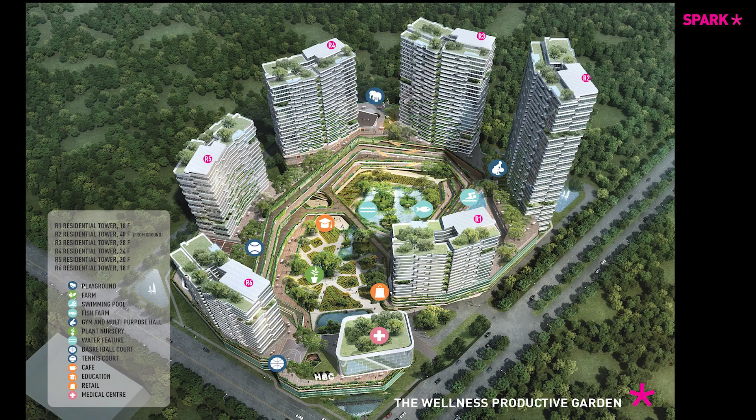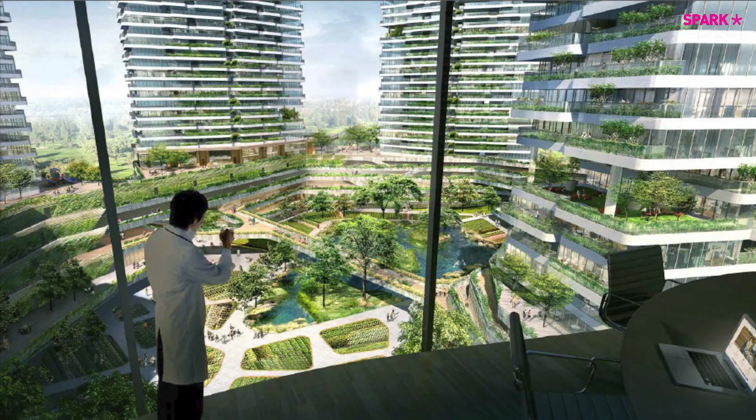Having done that research project, a doctor in Kuala Lumpur asked us to design this project for him, which is sort of Home Farm Mark II, configured in a slightly different way. It's a series of apartment buildings plugged into a ring, which is this productive garden that we worked on with Grant Associates and Atelier 10.

So all the apartments are arranged around it, sitting around this garden, and then the substrate, like Home Farm, is around the edges here. In the corner of the development is a hospital run by our client, who is the doctor.

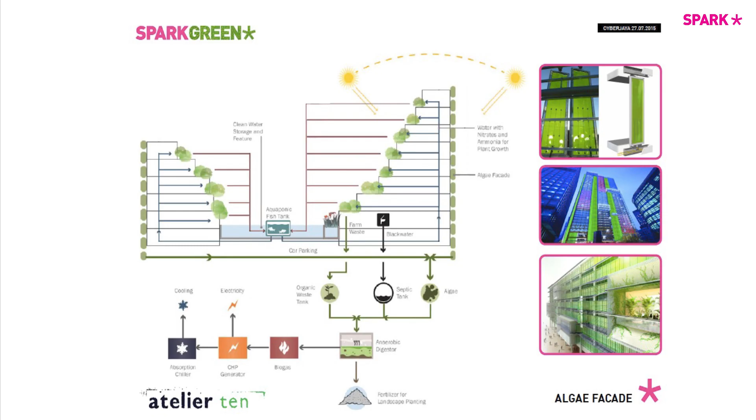And the edges of the car park are coated with these algae panels that absorb carbon dioxide, taking it from the car park and the streets around it, and purifying the air as well. So inside you've got the growing membranes and substrates, and outside you've got the algae production.

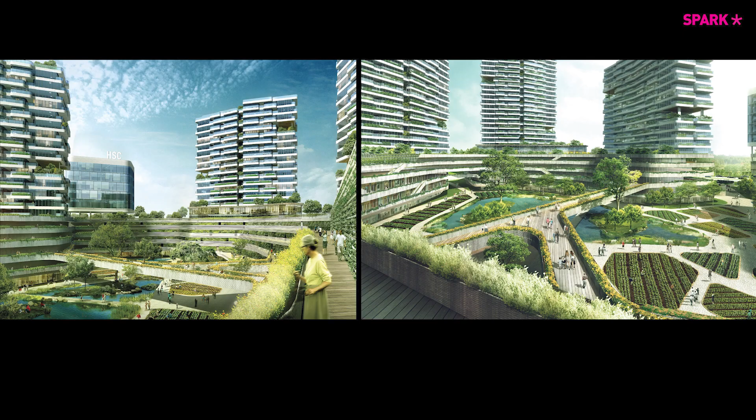And the reason for that is for every 3 people in China, there's an awful lot of people in China, as you know, there's 1 pig. Chinese love pork for some reason, but there's millions of pigs, creating an awful lot of pig manure.

And that finds its way into the water course, because although a lot of pig farming in China is regulated, that's the large-scale pig farms, but 40-50% of these farms are a lot smaller scale, individual farmers, very unregulated, so they just wash the pig manure onto the farm side, and then the rain washes that into the river course, which creates high nutrient levels.

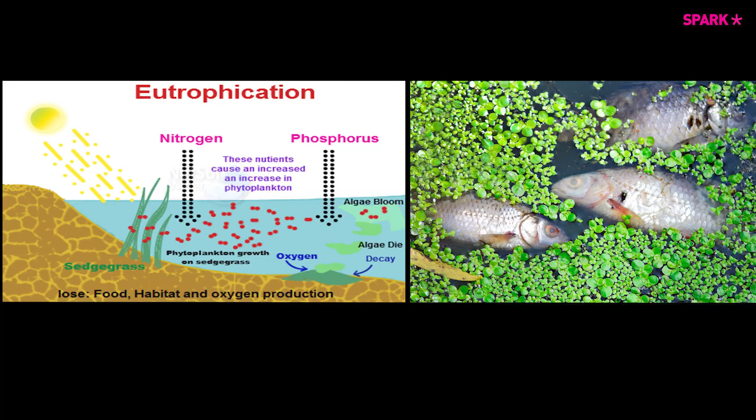In all the sort of water, the reservoirs etc, that kills the fish and creates what's called eutrophication, which basically, all this energy that goes in, the nutrients go in, suck all the oxygen out and kill everything else, and you get this terrible algae. So eutrophication kills basically everything in the water. And all that's caused by the pig shit being swept away, swept into the farms, then into the water.

So when I was a child, I used to spend a lot of time in Spain on holidays with my parents. And you used to see, I'm sure you've all seen sort of films by people like Bigas Luna and Jamón. Wonderful, these big sculptural bulls sitting in the countryside. I thought that was great. It's like, I suppose, the chalk horses in the UK carved into the hillside. These sort of quite interesting abstract monuments.

And that combined with things like Jeff Koons' artwork. I mean, you never quite know where an idea comes from. I suppose you've got this sort of collection of stuff that goes in your brain all the time. You have this lexicon of ideas that sometimes just come together. You don't know quite how or why they come together. But there's the genesis idea. You match the bulls of Veterano Osborne Brandy with Jeff Koons, and you come up with 3 Little Pigs.

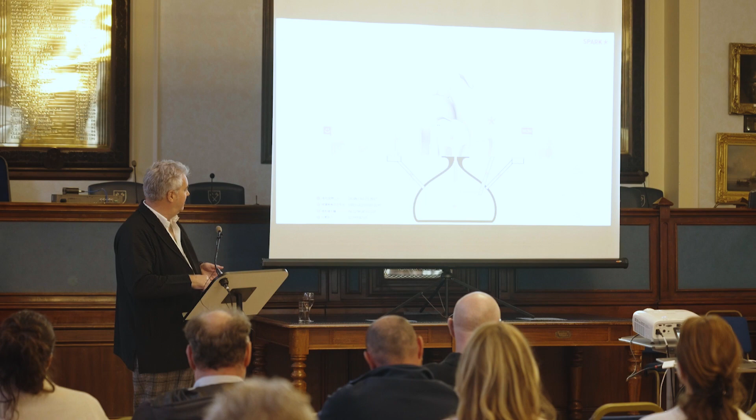I don't quite know how it works, but anyway, so you have the biodigester that sits in the ground. You have the drains, etc, so the farmers can wash the manure in, and it creates gas. And from the gas, of course, you can create energy.

You can put it through a combined heat and power plant, which you can get relatively small. So it uses the gas to create electricity, so the farmers who are adopting these things get free power. It's a sort of isometric drawing of it.

So the pigs are basically like balloons, and they inflate, just like a sort of gasometer used to grow out of the ground. These pigs become inflated as the amount of pig shit creates a lot of gas. It's quite poetic in a way, isn't it? So then you see these sort of pigs on the horizon, sort of a cluster like a piece of Jeff Koons' artwork. And they're just Teflon, they're coated Teflon.

Fab, isn't it? So, thank you very much.

Thank you, Stephen, and thanks for bringing us up to speed on your career for the last 30 years. I think it's fair to say you haven't been hanging around. And thank you for answering my question through your work, which is part of Spark coming through the Alsop days. I could see it, I didn't realise, but I could also see it comes from the Richard Rogers days. But what I think was so amazing about your talk is so much of it comes from your own personality and the way in which you've developed from those ideas into your own realm, and that's fantastic.